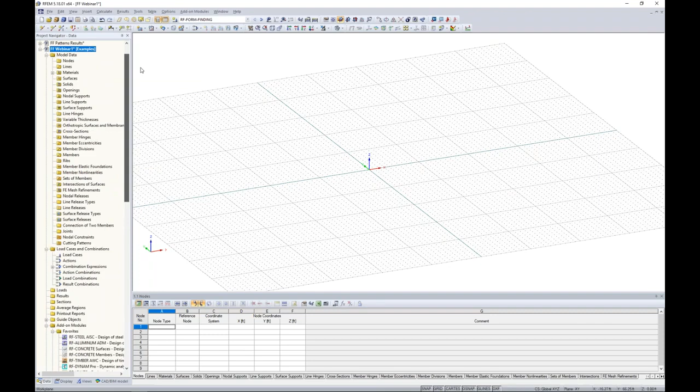Now, our results will also be available to us within the project navigator, which we'll get into a little bit later on. The fourth tab down here may be new to some of us. By enabling that CAD BIM model option, we now have this fourth tab to import in an IFC or a STEP file. So I can just simply click on one of these buttons and I have available to me my IFC building for my office building.

So with a few steps, we can see here that the IFC file is imported into our main program, RFEM. Now, I want to be clear that these are still just components. They're not actual elements within RFEM, meaning they're not surfaces, members, they're not solids. We would need to convert those to elements in RFEM. So right now, this is just serving as architectural purposes.

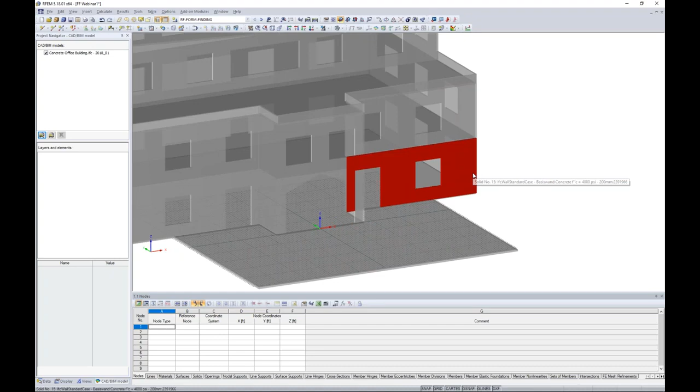And in particular today for this concrete office building, I'm trying to design a canopy on the front face of this building, but I want to make sure that it lines up perfectly with the front face of this office building. So that's the whole purpose of importing in this IFC file. We're not going to be designing the building today.

So what I can do is to take one of these elements, and in particular, we'll start here with our front slab. I can right-click to create a surface. Now, the program generates some arbitrary thickness and selects some material within the model. This really doesn't matter—we're actually going to end up deleting this slab. We're purely using the nodes and lines for geometric purposes to generate our canopy structure. So I can just click OK.

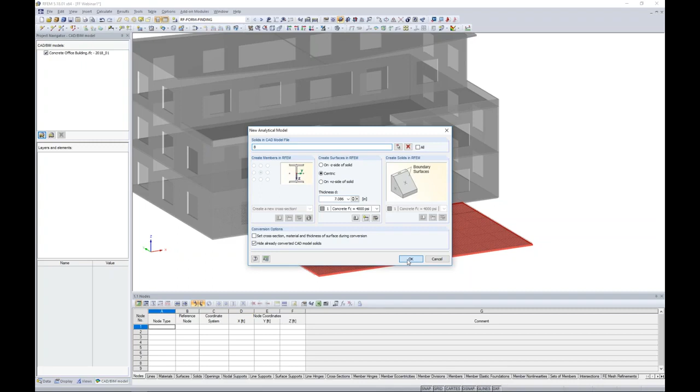So once I've done this, I can actually hide my IFC file, and all I'm left with is this shell element that I converted from that file into RFEM. So what we'll do here is to turn this into wireframe view with my view options up at the top. And I'll take this line element on the left side of my slab.

I'll right click to divide the line by a certain distance. So here is where I can select 23 feet from the line end, and I can see with my black arrow here what's the line start and what's the line end. I click OK. So all I've done is generated an additional node here right along this line length.

Now I can hold down my control key to select that new node in addition to this node here. I continue to hold down my control key and I take advantage of what's called our drag and drop. This allows me to make quick copies within the model without using that move copy tool. I want to additionally use this connect lines or members tool up here at the top.

So I select this, and what this allows me to do is to highlight over that node, and it simply broke that line apart in two. So I take these newly generated nodes, holding down my control key to select them, and now I'm going to use my move copy tool.

I'm going to create one copy in the global Y direction, which I can see my global coordinates here of -30 feet, and I click OK. So here are these new nodes generated at a distance of 30 feet in the global Y direction.

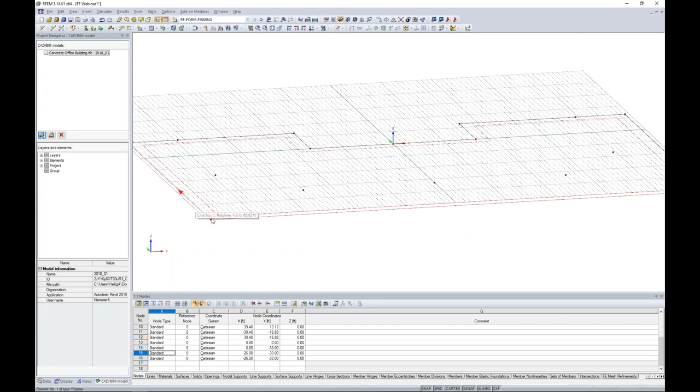This node will highlight, so I use the move copy tool and move it a distance of 26 feet in the global X direction. Once done, I hold down control to select both nodes and use the drag and drop feature to make a copy of the node on the left side. Now that we're done with the basic nodes at the bottom of our canopy structure, I'm done with this surface, so I select it and hit delete, and clean up the model by deleting the line elements we don't need, leaving only our nodes at the bottom.

The next thing to do is generate our columns. These won't be columns yet, just lines, placeholders which we'll later assign a cross-section and material to. To do this, I select the nodes I'm interested in, holding down control to select various nodes, then use my Move Copy tool.

We create one copy in the global Z direction, the vertical direction, of 23 feet. Before I hit OK, I go into Edit Expanded Settings, which allows me to create lines between my copied nodes, saving us an extra step rather than drawing lines manually. Once I click OK, the line elements that will eventually be our columns are drawn.

Now, in the rear of my canopy, this is where it will be framing directly into the office front face, so I don't need to draw columns back here. Rather, we attach at the top of the canopy directly to the office building. So I highlight these line elements and the bottom node and delete them altogether, leaving just these nodes up top.

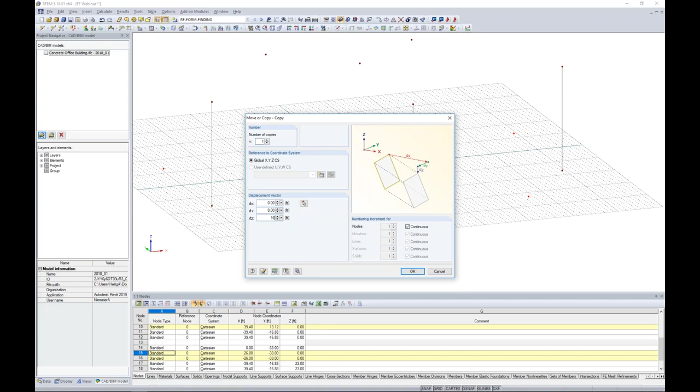In a similar fashion, I select the individual nodes left down here at the bottom, use my Move Copy tool once again, this time a distance of 16 feet, leaving this setting to create lines between nodes. I click OK, and here are my additional columns.

Again, back here we're framing directly into the office building, so I don't need columns back here, just these nodal points at the top. Just like that, we've finished the basic geometry from that initial slab. I'll turn off my grid down here, and I'm left with just these node points, ready to draw the outer profile of my canopy structure.

I can choose a new line element here in our quick tools. Keep in mind, I still have drawn no members within the program, these are just simple lines and nodes, exactly what you'd think of in AutoCAD, line elements only. We choose this straight line option.

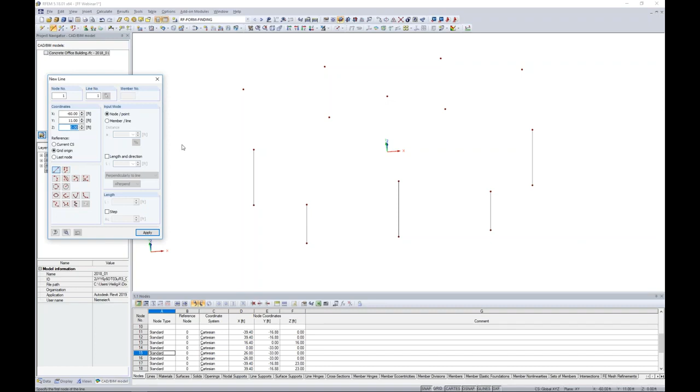Here I can snap to the different nodes I've generated, and the program is fairly good about using the O-snap settings to snap to the top of these nodes. I continue around drawing the structure, then right-click to exit, and we have the outer profile shown.

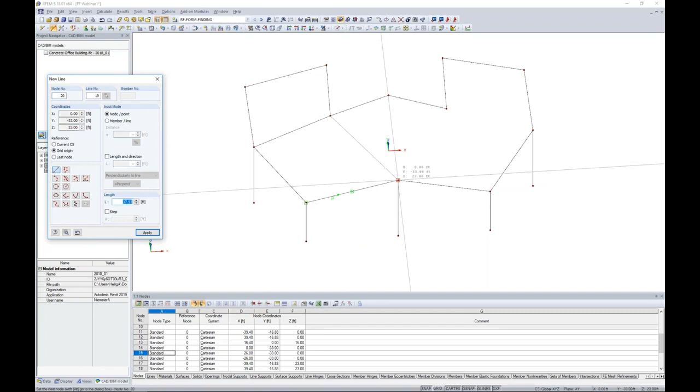Now I need to draw lines to define the individual cells of my canopy, so I continue by snapping from one node point to another, and we do so on the right side of the structure. Just like that, we are finished.

If we're interested to see how these elements frame into my office building, I can reactivate this IFC file of my office building. Remember, these are just components used for architectural purposes, so I want to make sure my canopy isn't framing over any windows or doors. So far, it looks okay.

So we turn that IFC file back off, and now we want to begin drawing our cable elements. These cable elements are going to be placed on the boundary lines of my fabric membrane, which is pretty common within membrane construction.

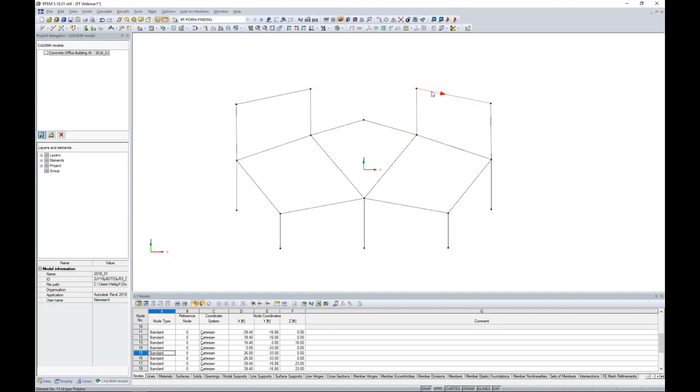These tensile cables will take the tension forces as the fabric is stressed. At locations where we're framing directly into the office building, these line elements will be cable elements, so we can assign cross-section properties for the cable elements to these lines directly. But for the other line elements at the front of the structure, we have a small issue. These will eventually be HSS steel members, but I also want to show cable elements at this exact same location. The problem is that both the steel member and the cable elements cannot share the same line.

So I need to draw a small offset line here to represent my cable as an arc member. How I can do this is to turn back on my grid at the bottom, and we don't want to use these global X, Y, and Z coordinates because we have some pretty odd geometries here. We have a nice feature in the program where we can define our own work plane by clicking on 3 grid points.

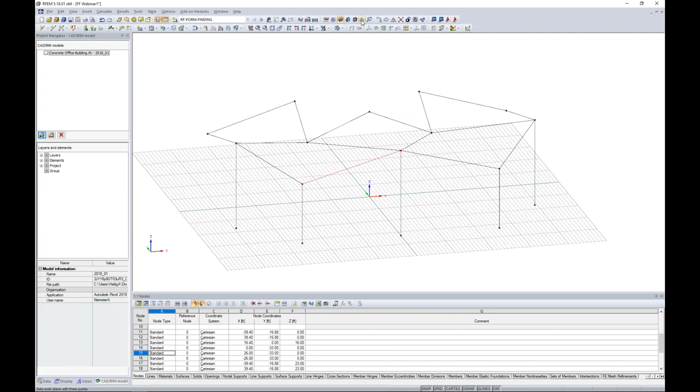So how I can do this is to click this option once, then click 3 times to define my grid, and you'll notice that my drawing grid is automatically placed at the incline that I've specified with those 3 points. It has a new coordinate axes of U, V, and W. So with this new coordinate system, I'm going to draw a new line again, but this time...

I'm going to draw an arc via 3 nodes. So what I can do is simply click on the point closest to what will be my office building, and click on the column point, and there we have it - a simple arc element. Now keep in mind, the arc radius is completely arbitrary, it doesn't matter what we set this to. The program will later override the shape with the form finding process, based on the pre-stresses that we put in, to find the correct catenary shape for us.

So I'm going to do the same thing at a different location here for my cell points. Again, completely arbitrary. We need to move up to the second cell, and we need to change our user-defined drawing grid. So I click first to reset the drawing grid, click it again to define my new point, and I can click on 3 points here. Now you'll notice that I have a new drawing grid at a specified angle.

So we go to draw a new arc here with the given points, and I can simply snap to these points, again, any arbitrary points. We need to lastly do so over here, so we click this option in our toolbar for a user-defined grid, click our 3 new points, and now we have the specified angle given.

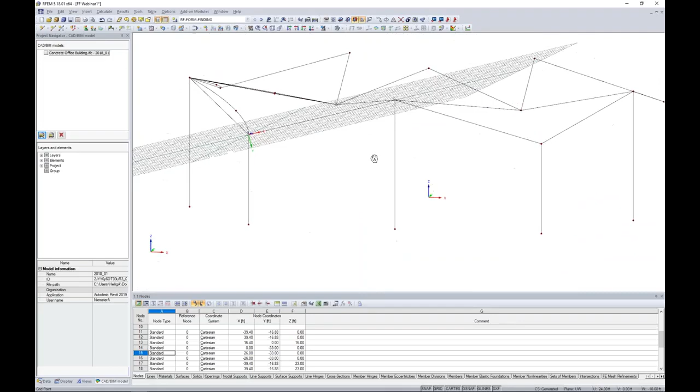We go back to draw a new line element as an arc with 3 points and continue on with this process for our additional cable elements. And one more time for our 3rd cell.

So deactivating this grid at the bottom, I have these cable elements shown here, and I'd like to show them on the other side. Rather than going through that entire process again with our user-defined grid, we can hold down our control key to select these cable element lines and take advantage of our mirroring tool - exactly like what it sounds like, similar to what you'd see in AutoCAD.

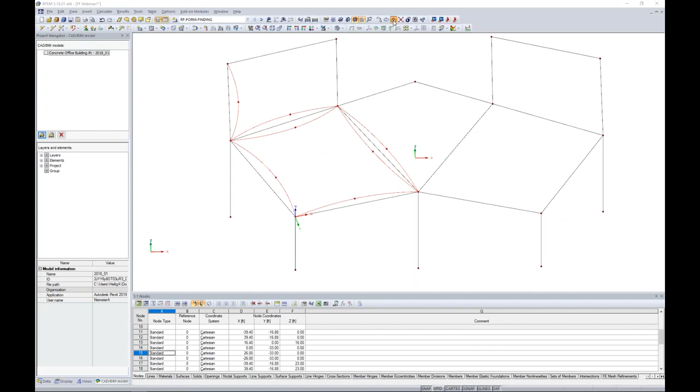We can create a copy by mirroring about the global YZ plane, and I can click any point within the model to mirror about. I click OK, and here we are presented with our cable elements on the other side of the structure. So that just saves us an immense amount of time.

So now that we've defined the boundary lines of what will be our fabric membranes, we can move on to drawing those 2D surfaces within the program. For this, I would typically suggest for a flat membrane to draw a new surface element. But you'll see here that all of these surface elements within RFEM are only considered in a single plane. If we take a look at this very complex geometry, I think we can make the assumption that these surfaces are certainly not in one plane.

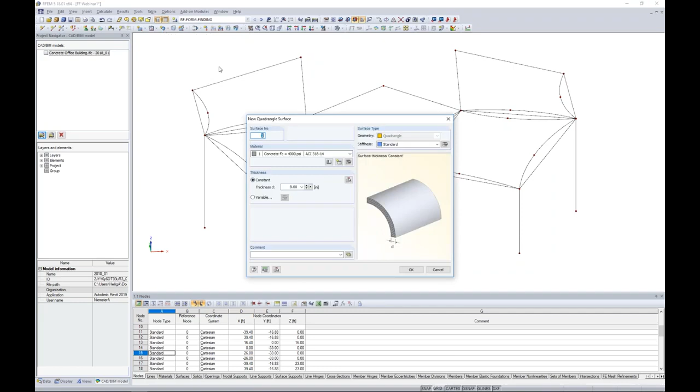So this is where we need to use the option for a quadrangle instead. We can use that from our drop-down list here - quadrangle, general 4-sided surface. The stiffness will be set to membrane orthotropic.

The next thing we want to do is define our membrane material. In all cases for these membranes, you're likely going to have to create a new material. We can do so by creating a new material, and a dialog box pops up where we give it a name. We'll call this one membrane.

We can even change the color. So perhaps for my model here, I go into my color palette and I'd like to use a green color instead of blue for my fabric membranes.

We change the material model here to orthotropic elastic 2D. I want to preface this that this information is likely something you'll get from the manufacturer, or maybe from your own testing methods or other relevant resources. For our example today, we know from our manufacturer that our fabric membrane is stronger in one direction than the other. But for the time being I'm going to set this as an isotropic membrane. The reason is because with these complex shapes of my membranes and the complex geometry of the canopy, I don't yet know which way I should span that strong axis to take the high tension forces.

I'll show you later on how we can easily determine that. So for right now, we want to set this to an isotropic material, which means it has the same stiffness, or modulus of elasticity, in both the X and Y direction. But keep in mind, we'll come back later to adjust this.

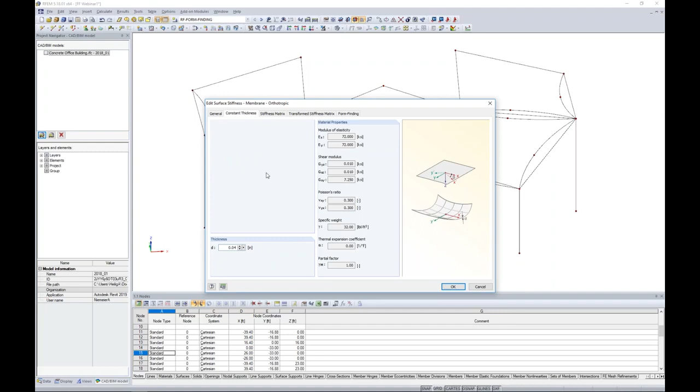What's quite powerful is that we can view the stiffness matrix of our membrane. So if you're interested, based on the material properties we put in here, this is exactly the stiffness matrix that will be reflected in the RFEM model.

And finally, our form finding tab. This is available because we have activated the form finding module at the beginning of the presentation. We have two different calculation methods for this, either standard or projection. Standard is pretty typical for fairly flat membranes, and we'll be using that for today. Projection would be used for more conical type structures.

With the standard calculation method, we can specify a pre-stress force in both the warp and weft directions. This is in the X and Y directions, and we'll choose 0.5 kips per feet. I click OK, and now we're done defining all of the various settings for our membrane.

We click OK, and the program asks me to go ahead and define the boundary elements of my fabric membrane. So you can see that as I begin to click what will eventually be these cable members, our fabric membrane is created. For the last cell over on the right, we right-click to exit out of that dialog box.

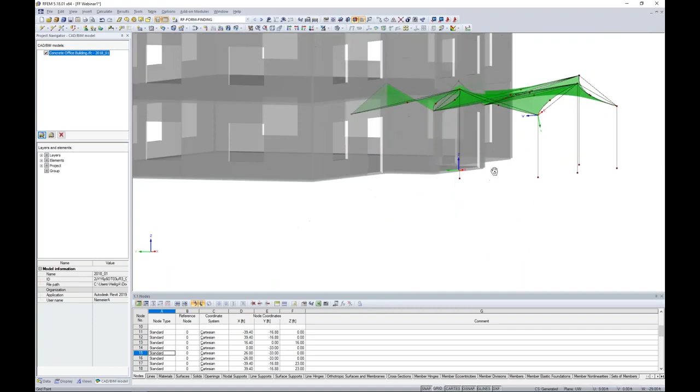Again, if we're curious to see how this frames into our concrete building, we can activate that IFC file, and we can see that everything looks to be great so far.

Deactivating that, we want to move on to the cable elements. So again, right now, all of these cable elements are just lines. They don't have a cross-section or material defined.

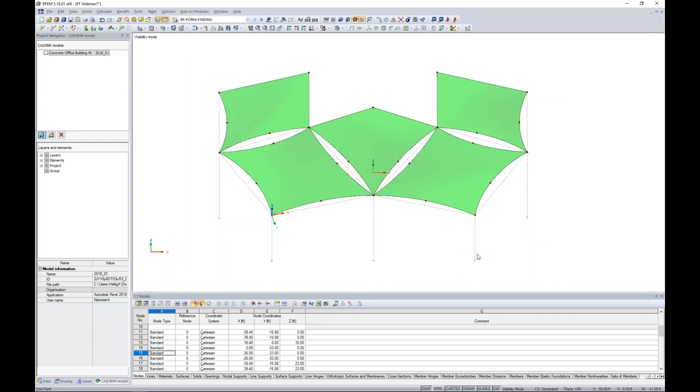What we can do is hold down our control key, select all of our membranes, and choose visibility by selected objects. When I do this, I can highlight all elements within my model. You'll notice that down here, my column lines and other various lines are not available to select, because I've deactivated them in my view. I only can select my membranes and their boundary lines.

So I can right-click to edit the lines, and we're brought into our line dialog box. The third tab here is called Member. This is where we can make a member available by selecting this checkbox, and here is where we can set the member type to cable.

The program's telling me I need to create a new cross-section, so I'll access my cross-section database, which you can see here we have all of our various cross-sections available within RFEM. We have several parametric sections, massive sections, thin-walled sections.

We have all the rolled sections from the various standards, and in particular today I'm going to use this solid sections. This just has some pre-populated diameters. They're basically just round bars populated from the AISC with set diameters, but you can always create your own with a parametric section. We'll choose a 1/2 inch diameter cable.

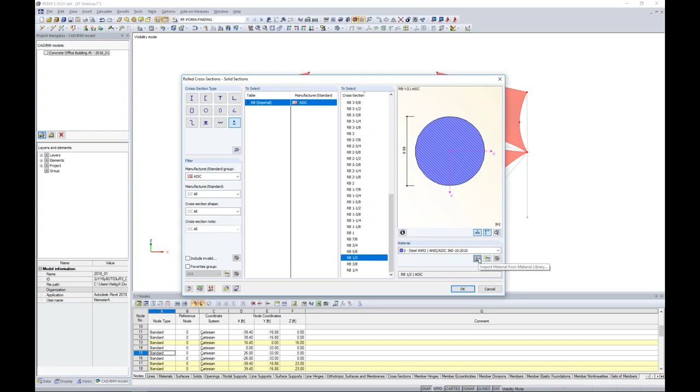The material is also set within this same dialog box. So with the cable materials, I'm going to access my material library. Similar to the cross sections, I want to use my filters over here on the left, and I choose metal, but under my second drop down, we can choose cable.

Typically when you first populate this, you'll only see a few materials available here from the manufacturer Pfeifer. If by chance you're using this manufacturer, then great, your materials are already set within our database, but likely you're probably going to have to add your own from whatever manufacturer you're using of those particular cable elements. So we can do so adding our own material with this button down here, create new material.

So what I went ahead and did is I created a new material, which if I back out of this, we'll be able to see it. And I called this one my ASTM cable material. Then we can put in the material properties, and you can set the applicable filters over on the left that you would like them to be available.

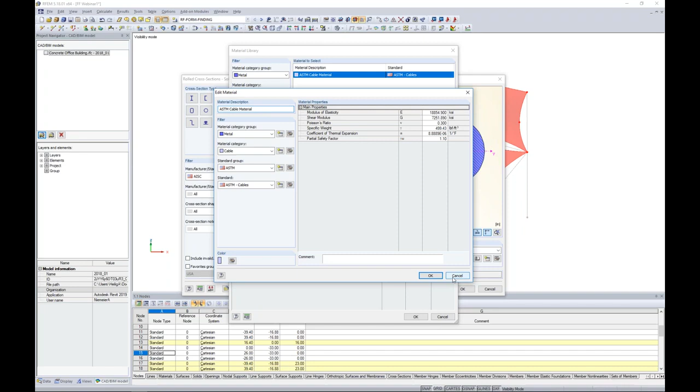Once you have input in these material properties and you've saved this material description, it will always be available for any future RFEM model, so you don't have to define it every time you create a new model. So once we've done this, we'll go ahead and use this ASTM cable material with my material properties shown here. I click OK.

And before we click OK out of this dialog box, similar to the membrane elements, we need to set our form finding settings. So I go ahead and click on this expanded settings dialog box, and this is where we can activate either a target cable length, a cable sag, or maybe we just apply a pre-stress force directly. So this is only available with RF form finding activated.

Essentially what this allows us to do is to model these cable elements as either straight lines, which you can see back in my RFEM model, or pretty much any arc shape like this. And everything will be overwritten based on these settings here. So for today, I want to use a target cable sag of 10%. I click OK, and I click OK through all of these dialog boxes.

Now, I know it's a little bit difficult to see, but we do have cable elements set for the boundaries of our fabric membranes. So I cancel out of this visibility mode, and we need to continue with this same manner for the additional line elements that are left here.

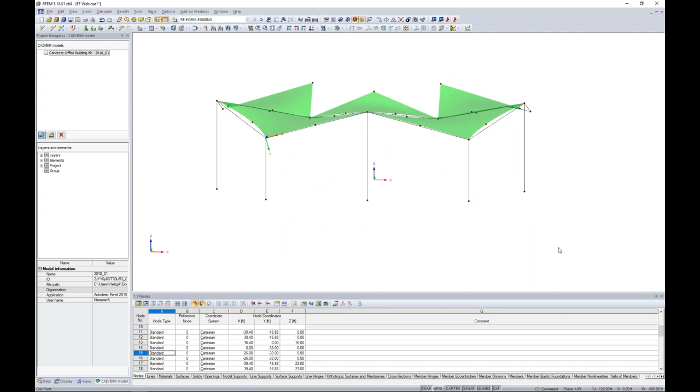So we'll start off with our columns. I'm just going to use my selection box here to highlight over the vertical lines only. I can double click, and again, we have a member tab where we can make this member available. Now, of course, we want to change this member type to beam. We certainly don't want cable elements for our columns.

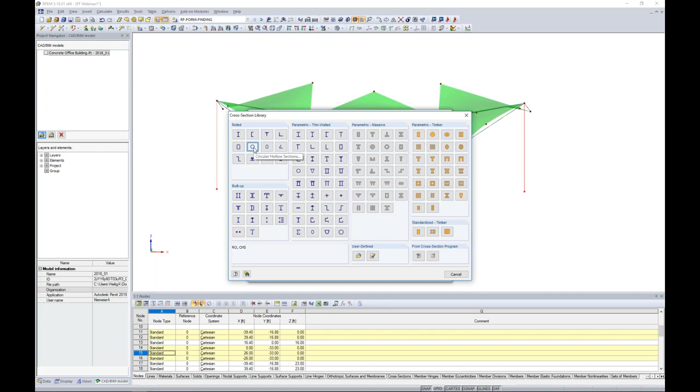We want to choose a new cross-section from our cross-section library. And here is where we can access our HSS sections directly from the AISC. Within this drop-down box, you'll also see the various other standards and manufacturers available. In particular, the CSA standard will be available here as well. So we choose the AISC 15, which is the latest version.

Now for my canopy structure, I'm really not trying to detract too much from the aesthetic appeal of this office building, and we know that this canopy isn't going to take a high amount of vertical gravity loads. So what we can do is choose a pretty low profile section here. We'll choose an HSS 4-inch diameter here, which we can see the cross-section properties available to us with this info button.

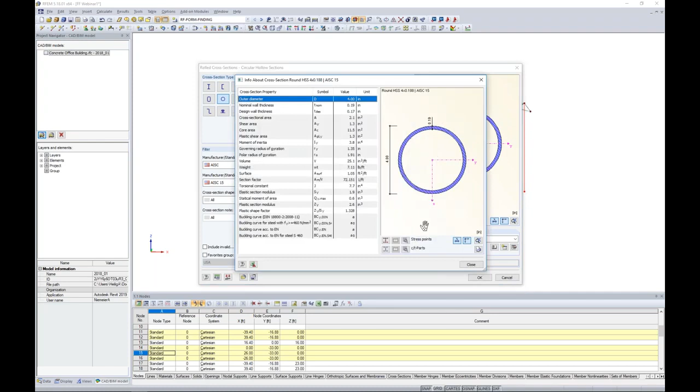The material is also set within the same dialog box, similar to what we just saw with our cable elements. So we can access our material library, and we use our filters over on the left here to select steel from the ASTM, and here we have available the 2016 version with all of the AISC materials available to us here. Again, if you want to create your own material, you can do so with that same button down at the bottom.

For today, we want to choose A500 grade B, and our given material properties are shown here. Once I'm done with these dialog boxes, you can now see these columns have been generated with the applicable material and cross-section shown in the rendered view.

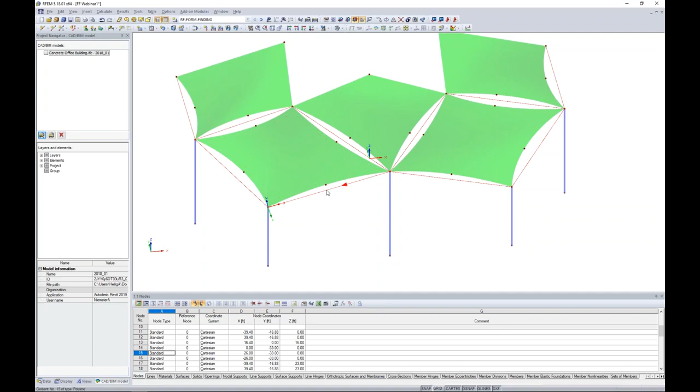So we need to continue doing so for our remaining line elements here. These will actually be our compression members, which we also want to set as HSS. We'll double click on these lines and again just choose the member type available here. The member type this time will be set to truss.

The only difference between a truss and a beam member is that the program automatically releases that moment at the member end. It's just a quick way to set in the program that we want to transfer only shear and axial forces. You'll notice that my member hinge option is grayed out down here.

We go to our cross-section library once again, and we choose our HSS sections. Because these are taking quite a bit higher loads, especially in compression, we need to choose a bigger diameter. In particular, we'll choose a 7.5-inch diameter.

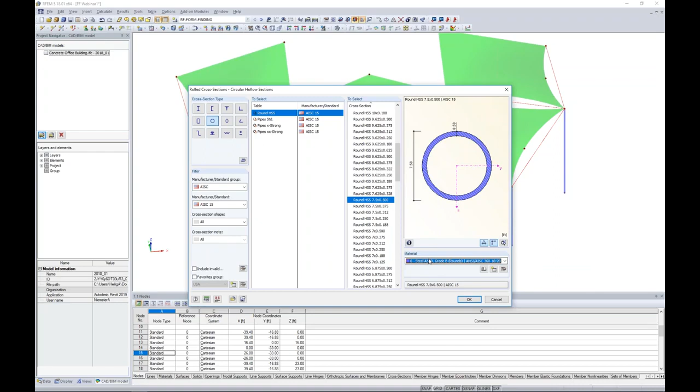I've already defined that steel A500 grade B material, so I don't need to define it again unless I want a different material category, but it's available to me here within my drop-down box. I click OK, click OK once again, and now you can see those HSS members available for our structure. So before we can run the form finding procedure, we obviously need to support this structure.

So what we can do is select a new nodal support up here in our toolbar. I choose a new nodal support, and we have a few default options shown. I will use the first default option, but to explain what's going on with these nodal supports, we have our 3 degrees in translation and our 3 degrees in rotation.

So for the bottom of my columns, I'm going to restrain translation. I also want to restrain rotation about the global Z direction. This is purely torsion for that column, so it's not free to rotate about its own axis.

We also have the partial fixity here for spring supports, and the nonlinearities are important, especially for today's presentation, because we have an option here called the form finding stage only. If by chance you want to apply a nodal or line support during the form finding process, when we're applying these pre-stress forces to both our membrane and cable elements, and you only want that support applied during that particular stage only, we can select this form finding stage only.

You'll notice the nodal support changes to blue to indicate there is a nonlinearity. So what will happen here is it will only be applied for RF form finding to find the initial pre-stress shape. Then for all other subsequent static loading, such as live load, dead load, snow load, and so on, the support will not be considered at all.

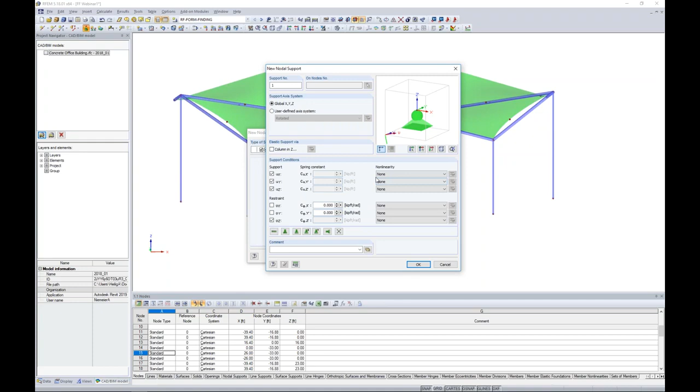So extremely helpful for when we're trying to find stability during that form finding process, but you do want to make sure that this would truly be available out in the field when you are pre-stressing these membranes. You don't want to use them in the model if you're truly not using them out in the field. So for today, we're just going to use that first hinged option for our support with no nonlinearities applied, and we apply them to the bottom of our columns.

Now, for the locations framing into the office building directly, we also want a pin support, which I can access with my nodal support once again. I'm going to create my own definition here because I want to release the moment in the Z direction as well, so I only have a typical pin with translation restraint in the X, Y, and Z. I've now defined that particular support type, so I can click directly on my nodes where they will be framing into the office building. And just like that, we are done with our geometry.

So back under the data tab, as I mentioned, all of our input data has been applied here, so we can easily make changes to all of these cross sections as well as materials. The next thing to do is to run the form finding process.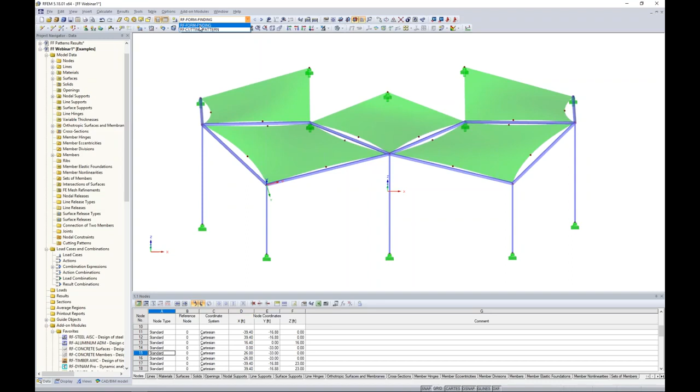So I have applied no loads to my structure yet. I've only applied those pre-stress forces. In my drop-down box here, we see RF form finding available to us, and we can easily run a quick analysis for this. So all I'm doing is applying those pre-stress forces to both the membrane elements and the cable elements to find the true deflected shape here after those pre-stress forces have been applied.

So what I'm presented with are my results within my project navigator, and we can see that tab available to us here. What's probably most interesting is the initial deflected shape. I think this is very telling for us to know if we've defined everything correctly. If you're seeing a deflected shape that makes absolutely no sense, then you probably have modeled something incorrectly. Perhaps we're missing those cable boundary elements to take those high tensile loads, or maybe you're running the wrong calculation method with the form finding procedure. So you definitely want to take a look at the deflected shape here.

So what the program has done is create a new deformed mesh based on my settings here that we can now move forward with. But before I do so with the additional loading, I want to point out some very powerful features in our results that are given to us after running RF form finding.

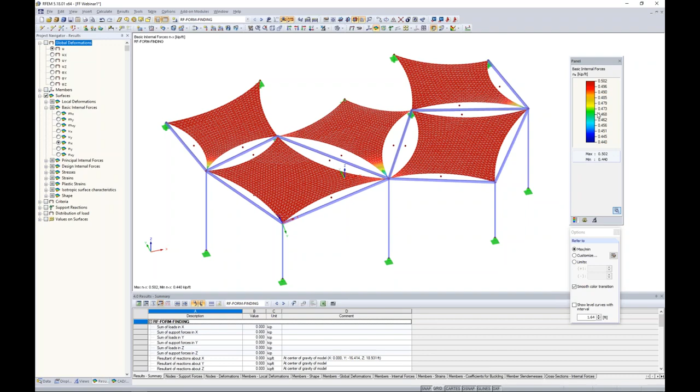The first would be to take a look at our global deformations, but we can also look at our surfaces, and in particular the NX and NY forces. These are the tensile forces that have been applied to our structure. Remember, I set this at 0.5 kips per foot, and that's reflected here almost identically within my basic internal forces, NX and NY. That's a really good sign that the pre-stress forces are available to me with these axial forces for my membranes.

The other interesting thing within our results is under this shape tree, where we can view the different contour lines. These show us from the origin point of 0 exactly what elevation we're sitting at in terms of feet. Obviously, the points sitting up at these higher columns are going to have a higher contour line than the membranes sitting at these lower columns.

We can also view the inclination. This makes sense that if we look at this location here with red, we have a pretty steep incline where this fabric membrane is framing into that support. But at these locations at the center of the membrane, we have almost no inclination, close to 0. That's where the fabric remains fairly flat. We can also view the inclination direction here to give us a sense of exactly how this fabric is pre-stressed during that form finding procedure.

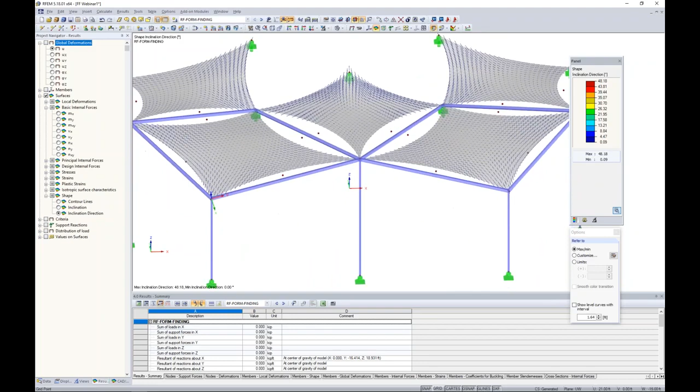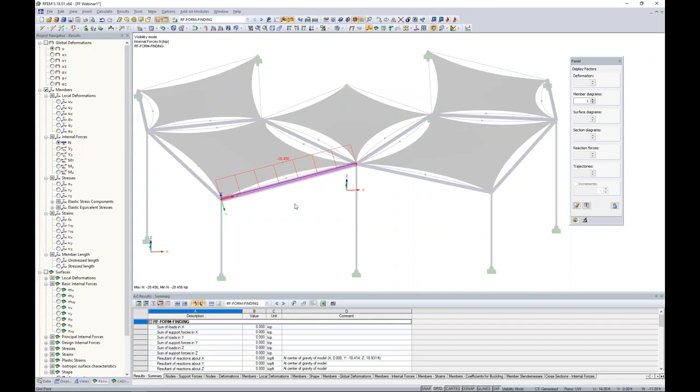In addition to my surfaces, I also have the internal forces available for my members. Perhaps I'm interested in viewing the axial forces within some of these HSS members. I can take any one of these members and create a user-defined visibility here, only looking at this single HSS member, and view those compression forces based on the pre-stresses applied to the membranes. I can always right-click to view the results diagram, which lets me view in more detail exactly what's going on along the member length.

If I cancel out this visibility and take a look at only my cable elements, under the Views tab within our Project Navigator, we can select our members by type and choose the cable elements only. Now I'm only viewing the results for my cable elements. I go back to my Results tab and view the axial tension forces within these cables.

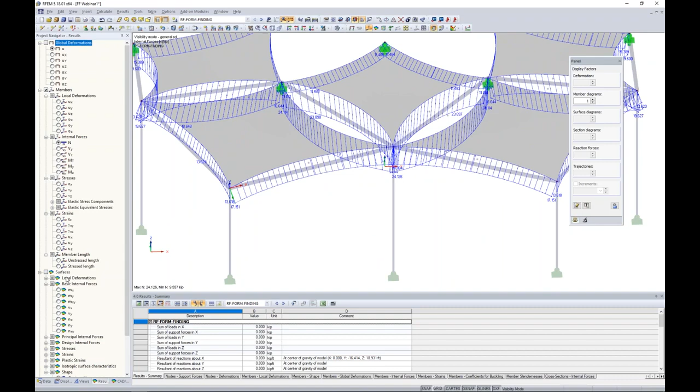In addition, we have a couple options available under member length. We can view the stressed length of these cables as a member diagram in terms of feet—this is the length after we've applied that pre-stress force. We also give you the unstressed length. I think this is really important because it's information we want to give to our manufacturer, to ensure they manufacture these cables at the correct length, probably this unstressed length, so that by the time we get out in the field and apply these pre-stresses, we should achieve this stressed length. So both are given to us.

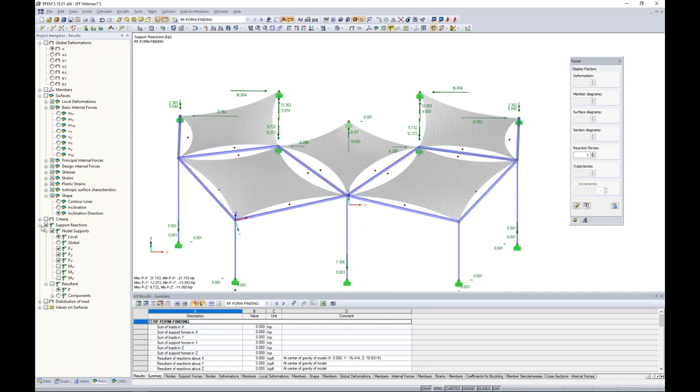Now, additionally, if I take a look at the full model view here, we can also view the support reactions. This might be important for designing the connections that are framing into our office building. All of that information is available for the form finding process only so far. Of course, much else to cover, but we'll go ahead and move on with our structure—so far I have only applied those pre-stress forces.

I've applied no additional loads to my structure, such as live load, snow load, and so on. So we want to go ahead and do that now.

I'm going to create a new load case up here in my toolbar, and up pops my edit load cases and combinations. My first load case description will be self-weight. What I'm going to do here is not put self-weight under dead, but actually put it under form finding. So what exactly am I doing here? Well, that form finding process I just showed you did not include self-weight.

Just keep that in mind. In reality, when we go out to the field and pre-stress these elements, it's inevitable that self-weight will be included. So you'll want to create a load case under the form finding category with self-weight active in the negative Z direction to account for that during the form finding process. We didn't do that initially, but now we can account for it with this load case. Any other loads available, such as for pneumatic structures, we'd also want to put under this form finding case. It's important to understand that for any additional load cases, the program tells me I have to clear my results because previous results are no longer valid. We don't want to add any additional self-weight to any of my other load cases since we've already accounted for that in the initial self-weight load case during form finding.

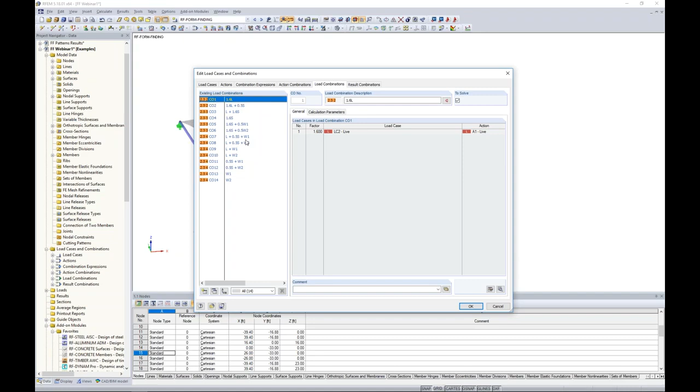My load combinations tab will simply list out all of my LRFD load combinations based on the standard. My result combination is just an envelope solution - both my max and min values will eventually be presented within our results for all of the LRFD load combinations. So what I've done now is set up those load cases and combinations, which should be available to us in our drop-down box here.

But now I actually need to apply those loads to my structure. My self-weight load case - we don't need to do anything, everything's done automatically there. My live load case, according to ASCE 7-2016, in particular Table 4.3-1, addresses awnings and canopies for fabric construction, and this requires a minimum live load of 5 PSF. So to adhere to that, we want to apply a new surface load, which we can do in our quick tools up at the top. The load direction will be set in the global Z direction with a magnitude of negative 0.005 kips per square foot. I click OK, and then I simply highlight over all of my membrane surfaces.

In a similar fashion, we want to apply snow load. So what I'm going to do here is go back to a new surface load. You'll notice I have snow load selected in my drop-down box here, and now my load direction is going to be in the global Z projected area.

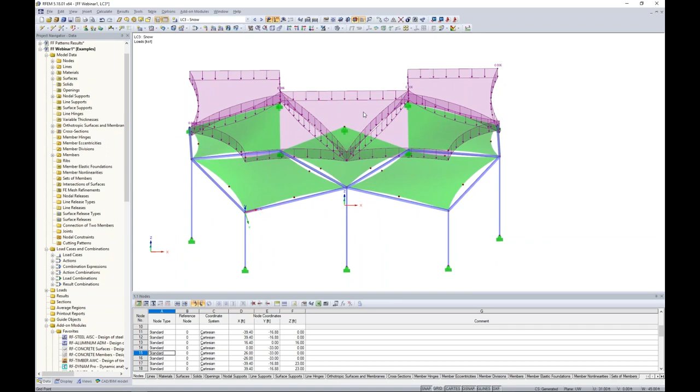I'm going to apply a fairly small magnitude here. Let's say we're in an area that we're not too concerned with snow loads, but we want to apply 6 pounds per square foot. When I click OK and highlight over all of these members, the advantage of a projected load is it will take into consideration the inclinations of my surfaces. In areas with high inclination, that's where we'd see snow slide off, so the program accounts for those angles. At areas where our membranes are relatively flat, we'll see higher snow loads. That's the advantage of a projected load.

When it comes to our wind loads, according to ASCE 7, Table 30.11-1, this addresses wind loads on attached canopies. For time's sake, we don't have time to get into this today, but I just wanted to briefly mention that.

For these specialty type structures, I want to mention something from my PowerPoint that we are currently working on in development — a standalone program called RFlow. What RFlow will eventually allow us to do is simulate wind flow around structures, helping us understand wind effects on specialty structures where there's really no clear approach within the various standards.

It could be argued that our particular canopy today is a pretty complex geometry, framing into this office building. How exactly do these wind loads affect specialty structures like this? This will be a huge advantage once we release it. It's not quite ready, but we do plan to integrate it with the RFEM model, so you'll be able to bring the geometry into RFlow, apply wind loads, and export those loads back into RFEM to be considered in the analysis.

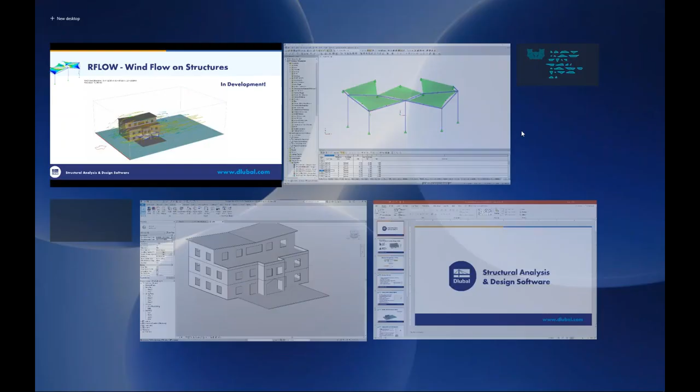So I did want to mention that—something exciting to look forward to—but for now, we have to jump back to RFEM and manually apply these loads.

For our simple load cases today, we'll apply a new surface load in the projected X direction. I only want the surfaces that have actual face value according to the global X-axis to be affected by these wind loads, and we give it a magnitude of 0.15 kips per square foot. I can highlight over my particular membranes here. Now for the downward pressure, we go to a new surface load.

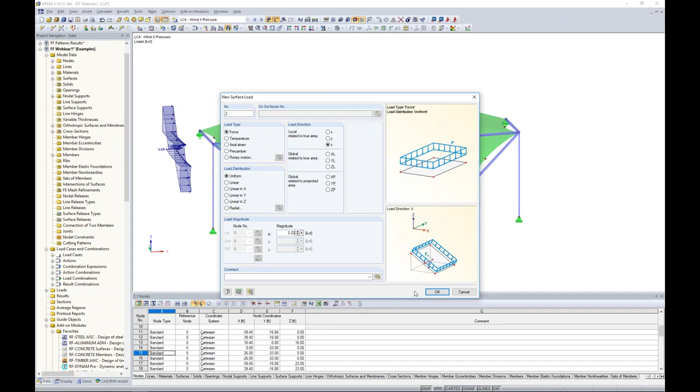We want to apply this according to the local z-axes of my membrane. I'll show you in just a minute how to view those local axes, but trust me, the z-axis is how we want to apply these to our structure, with a magnitude of 0.02. This is based on the local axes of the member, so now we can see those loads applied normal to the surface no matter what the geometry is.

For our wind in the X uplift direction, it's the exact same scenario. We just simply want to change the magnitude direction and put a negative here for our uplift pressure, highlight over our members, and now you can see that uplift pressure normal to all of those surfaces.

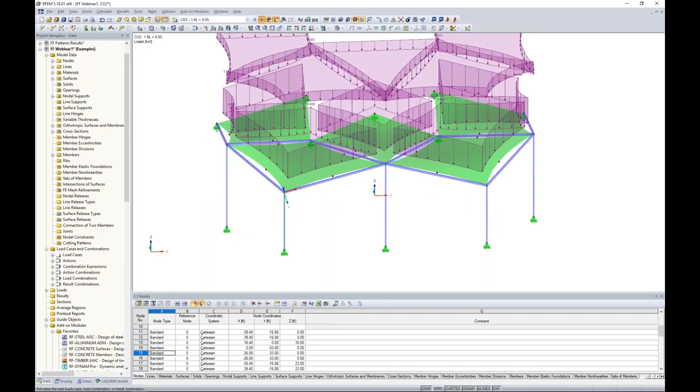We also want to apply that small lateral load in the X projected direction. This time we'll give it a slightly higher magnitude than the previous load case, and highlight over all of our members. Then we can scroll through to take a look at all of the different loads applied to our structure based on wind, live, snow, and of course self-weight.

Before we're ready to run an analysis, remember several minutes ago I explained we're setting this to an isotropic material. In reality, we have an orthotropic material. I need to determine which way to orient these membranes in order to take the highest tensile forces. So how exactly do I consider that?

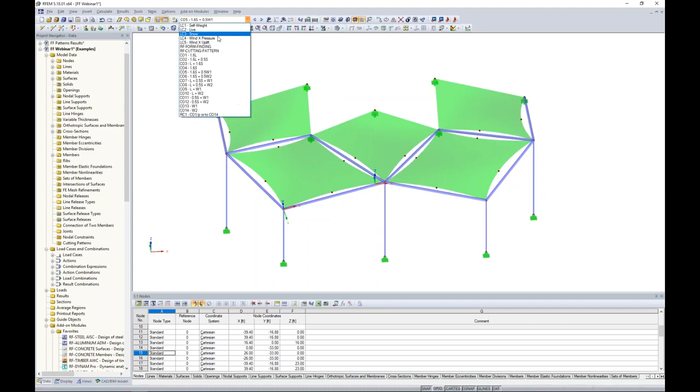What I want to do here is jump to only my live load case, and I'm going to apply the live load case only to the structure. Remember, we lost our form finding results previously because I said I want to include self-weight now. So we're now including self-weight, and the program needs to run back through that form finding procedure. Then we're applying the downward load for live load.

Now the program is going to cycle through. You can see the iterations here for max displacement for the different iterations applied, and eventually we'll be presented with our results. So again, we're using just this single load case to determine where these high tensile forces will be acting on our structure.

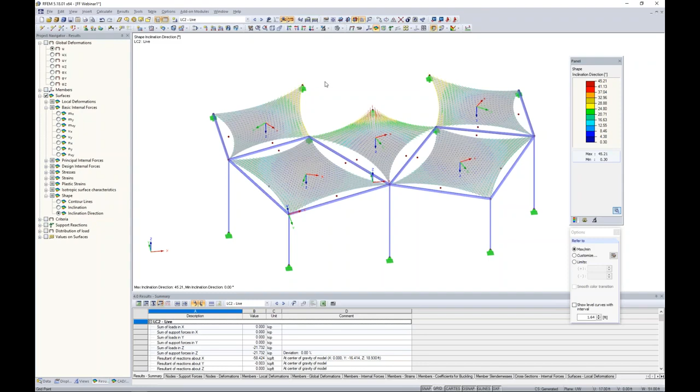So now we're presented with our results here. This is similar to what we've seen before, but now we have this live load acting down on the structure. I'm going to right-click on these surfaces to view my local axes, so there's my X, Y, and Z axes. Now, if I take this into an elevation view, I want to choose this option, surfaces, here from my results.

In particular, Alpha M is going to show me my trajectories for my load distribution, in particular for N1 and N2. This is showing me where my high tensile forces are within the member, and we can use it in addition to this colored profile panel here.

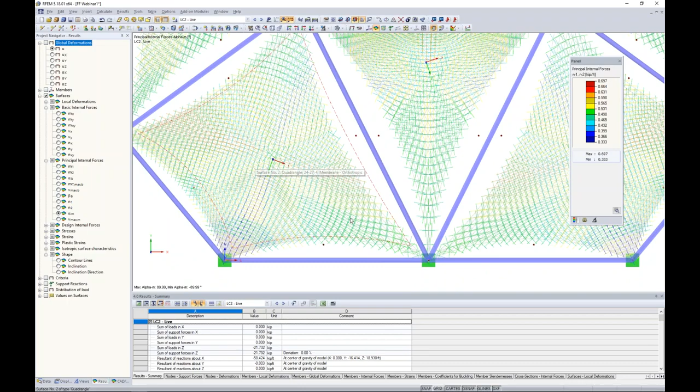If I take a look and compare, I know it's a little difficult for you to see, but I can tell my high tensile forces are spanning closer to the office building support down to where this column is for my first membrane. If we look at the second membrane, the higher tensile forces span in the opposite direction, from our upper left column down to our lower right, and so on.

So how do we orient the local axes of these members to make sure they're taking the high tensile forces? To do this, I'm going to turn back on my grid at the bottom, uncheck the option for my user-defined grid, and change this to the XY plane, so now we're just looking at that drawing grid at the bottom of our structure.

We probably want to take a screenshot here, or just approximately remember which way these high tensile forces are spanning, because once we draw a new line element, the program will suggest that I clear my results in order to change any geometry within the model. That's not a problem.

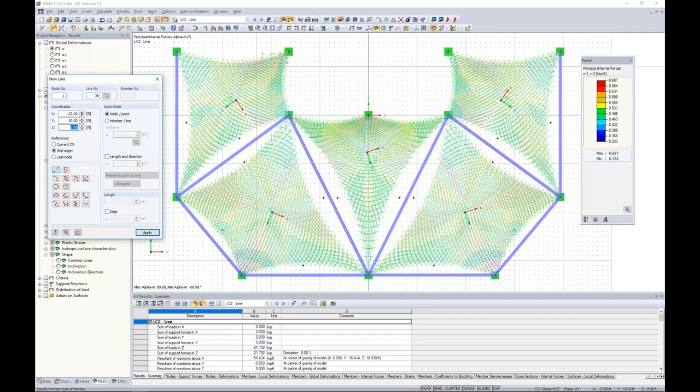I'll go ahead and create my first line element spanning in those high force areas. I clear my results, that's fine. We right-click and do the same thing for our second membrane, and finally our third membrane here. I'm going to take these two line elements on the left side and mirror them about my YZ plane. I click OK, and now I have those line elements shown on the other side.

So you might be thinking, what are these lines going to help us with down here? If I go back to the elevation view and double-click on my first surface, I have an axes tab. This axes tab allows me to line up the local x-axis parallel to any line I choose within the model, and I choose that line element I just generated. I click OK, and now you can see the local x-axis lines up perfectly with that line.

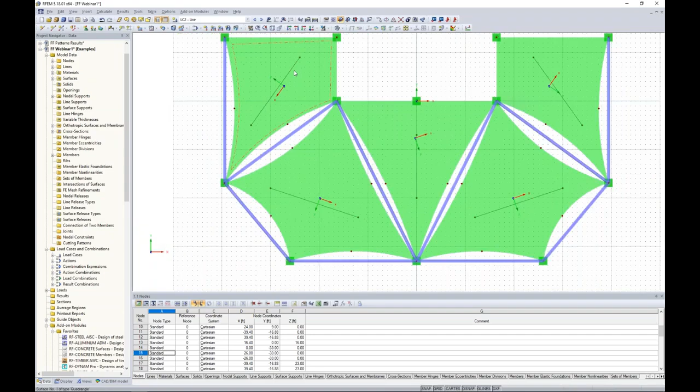We haven't really affected our model otherwise with these line elements down at the bottom of the structure. I do the exact same thing for my second axis. I choose the axes tab, select my x-axis parallel to my line, and you can see it's fairly close already, and it lines up to my second line. Same option for my third membrane.

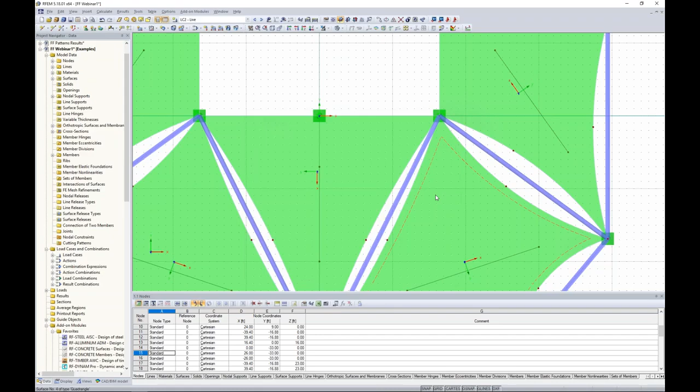I choose the local x-axis parallel to line number 38, and we continue around the remaining structure. The program automatically populates that tab I was just in, so I don't have to fumble through finding the same axes tab each time. Lastly, we choose our last fabric membrane and line the local x-axis to line number 39. I click OK, and now you can see the local axes are all lined up to take those high tensile loads.

The final thing we need to do before running our analysis is remember my materials, which I can access from my project navigator. I can select it graphically as well, but an easy way is to highlight it in the project navigator, and the membranes that utilize that material get highlighted. Concurrently, I double-click on it, go back into my material model settings, and this is where I change the stiffness in the weaker direction of my membrane, EY, to 44 KSI, and click OK. So this is just an easy way to determine exactly which way your fabric membrane should span in order to take those higher forces.

So once we have done that, we're now ready to run our analysis for all these load cases and combinations. Now it does take just a minute, so for the sake of time, I went ahead and ran all those load cases and combinations, and the results should be available to us here within the project navigator.

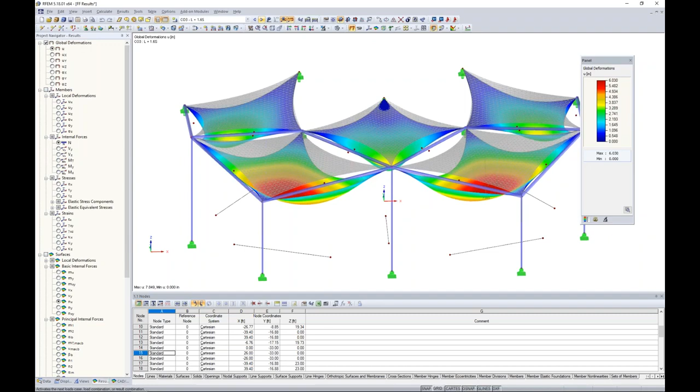I can scroll through the different load cases and combinations, and in particular I'm looking at the deflection. What might be interesting are these uplift load cases where we have that wind pressure applied. So all of those same results that I just showed you are available here within the project navigator, which we don't need to necessarily go through all of those again.

What I do want to briefly touch on is design of the supporting structure. Or actually, let me back up one more time. I want to also explain that when we are designing these fabric membranes, we want to take a look at NX and NY.

Now, probably from the manufacturer, we're given some strength for this material. We want to make sure that we're designing with a specific safety factor in mind. Now, this is usually around 5 or so of the material strength, so you can compare that to these basic internal forces. Now, this all depends on which project you're designing for, maybe which state, which standard, and so on. So that's really up to you as the engineer to determine.

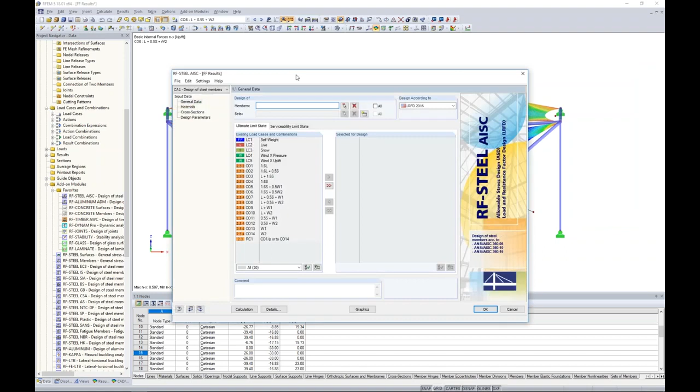But that's likely the information you're interested in for the fabric membranes. Now, as far as our steel members, this is where I want to launch our add-on module RF-STEEL AISC. Now, we also have RF-STEEL CSA for Canadian steel design. And this module is a little bit different than, of course, what we saw with form finding, which was embedded directly within RFEM.

This brings up a dialog box here, and all of my information is brought into this add-on module. I'm just defining a little bit more information that's specific to the AISC standard for the design. Now, I want to explain that I'm really going to breeze through this quickly. I've done previous webinars devoted entirely to steel design that I'd like to refer you to on our YouTube channel if you are interested for more information on this. The whole purpose is just to explain that you can do the entire structure design all within one program.

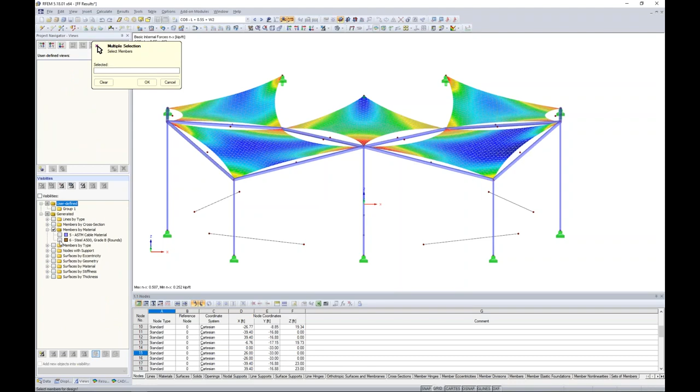So for this, we want to select our members to design. And an easy way to do this is to jump to my Views tab within my Project Navigator, and I can select my members by material. I'll choose my Steel A500, which includes all my HSS members, and I can graphically select them here.

I can choose my LRFD load combinations to design per the ultimate limit state, and I'm designing per the AISC 2016 LRFD. Now you can see that the materials are populated here. Steel A500 is brought in. My cross sections are all brought in from my main model. The effective lengths, for example, would be my unbraced length for buckling about the strong and weak axis, flexural torsional buckling, lateral torsional buckling, and so on.

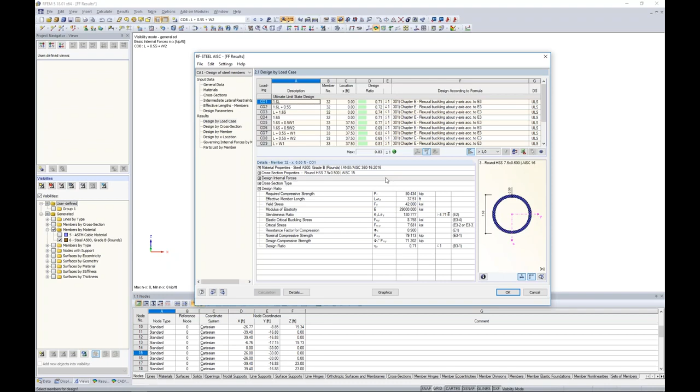So what we can do is run a calculation here. Now, all those internal forces for my members from all the different load combinations are quickly brought in. You can see how quick that solves. The AISC equations are applied to each member, and we can view our results in table format.

So when we view the design by member, we can scroll through all of these different tables here to see how exactly the AISC has played out for these particular members. You'll notice everything is highlighted for these tables and synced up within the RFEM background. We're getting a design here for our HSS members of 0.83, which I would say is pretty great for design purposes.

We can view this information graphically back in RFEM, so we're technically still within this steel AISC module, but we're viewing our results graphically here back in RFEM. So again, I know it's a really quick explanation, but again, refer to those previous webinars that I have created.

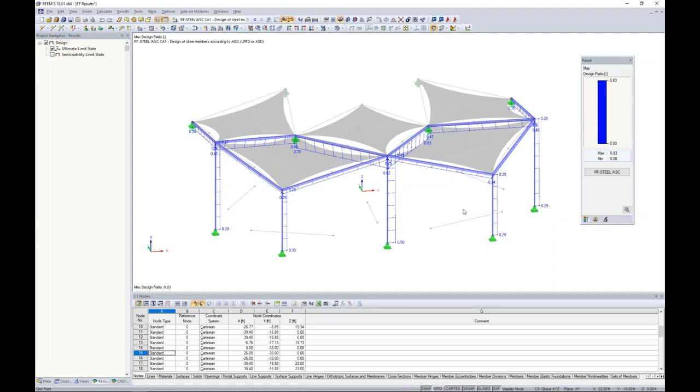Okay, so the next thing that we want to do is to quickly generate our cutting patterns. And for this, what I'm going to do is go back here to my PowerPoint to explain a few features of the add-on module RF cutting pattern. So what this allows us to do is to generate small planar cutting patterns in a 2D environment, which we will eventually use to create a double curved membrane in a 3D environment with those pre-stress forces applied.

An easy example of this, and of course this reflects our model today, is that if our end structure we'd like it to look like this, we obviously need to give some information to the manufacturer that's creating these fabric membranes in a 2D environment so that when we're out in the field, these will fit together nicely. So it's actually a very complex behavior to generate these 2D cutting patterns.

RFEM in particular uses the minimum energy method, so this is a very accurate analysis. This is in comparison to a lot of other cutting pattern programs out there that typically use some type of geometric flattening method. The minimum energy method is much more accurate and efficient for complex geometries.

What the program will do is press the mesh geometry of the curved surfaces into a plane using a press with frictionless press areas. This eventually results in our tension and compression stresses from this flattening process being in complete equilibrium. So that's the huge advantage of utilizing this minimum energy method.

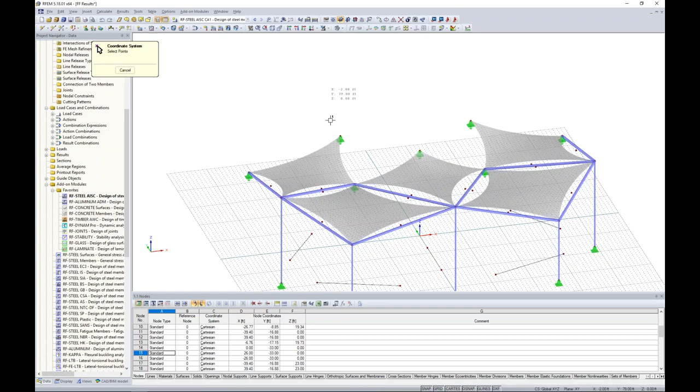I'm going to exit out of the results view here and create a new user-defined grid. This is exactly what we saw before. I'll select this option and click on 3 different points, and you can see the program automatically places that grid right through the center of that membrane.

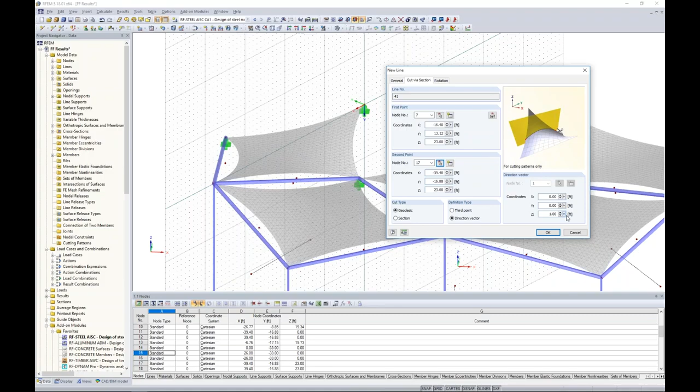To begin generating my cutting patterns, I right-click on a line and choose New Line, Cut via Section. Here I can select only my first surface and click OK. Then I choose my first point of my cut, closest to our office building, and my second point where it frames into this lower column. The cut type will be geodesic with a definition of a direction vector here in the 001 orientation. When I click OK, the program automatically creates this line element right through the membrane element with the form finding shape considered.

This is still too large for cutting patterns, so I need to continue drawing these geodesic lines further on this particular surface. I take this line element and use my Move Copy tool. Instead of using the global X, Y, and Z axes, I'm going to use that user-defined axes I just created in the UVW direction, and create 2 copies here in the V direction of 6 feet, then click OK.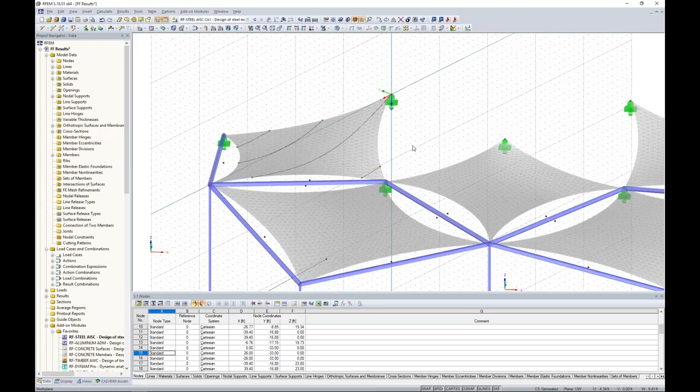Now you can see the program has generated a couple other line elements. We use the Move Copy tool once again in the Y direction, only 1 copy with a spacing of -6 feet, and click OK. So what we want to continue doing is placing these geodesic lines onto each membrane here. For the sake of time, since we're already running out of time, I have done that already with an already saved model.

So we continue placing those geodesic lines, and once we're complete with that, we simply go up to Tools, Generate Cutting Patterns from Cells. It's as easy as that. The program asks us which surfaces; we select surfaces 1 through 5, which is automatically populated, and the program automatically detects these different cells to generate these cutting patterns.

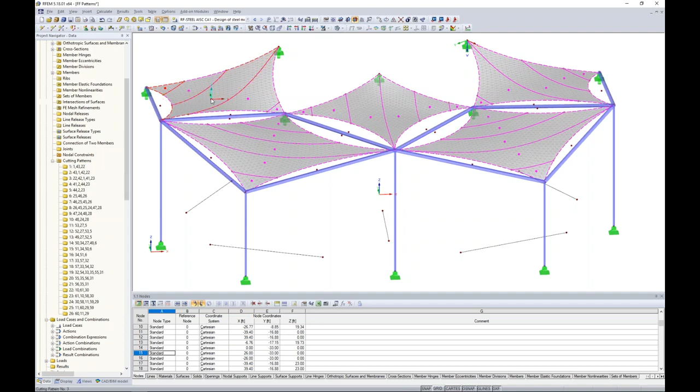What I'd like to point out is that our cutting patterns are now available to us in our project navigator, and you can see they're synced up in the graphical view as I go ahead and choose the different ones in my project navigator. We can double click on any one of these cutting patterns.

And this is where I want to point out that we can go ahead and add in here what's called compensation, which we already covered, in which case we now have a compensation tab that we can add in a percentage in the warp and weft directions.

We also can account for those allowances. Under the Allowances tab, this is that additional fabric. In our case today, we want to add in some additional fabric for those welding seam lines of 0.16 feet. The border lines, let's say we want to add in 0.33 feet. So that's going to be applied to this particular cutting pattern.

Now, if you don't want to apply it uniformly to all of the line elements for that pattern, you can choose the option here to define different lengths as well for each border line. And by the way, you can select multiple cutting patterns here and apply the same allowances to multiple patterns at once rather than individually selecting them.

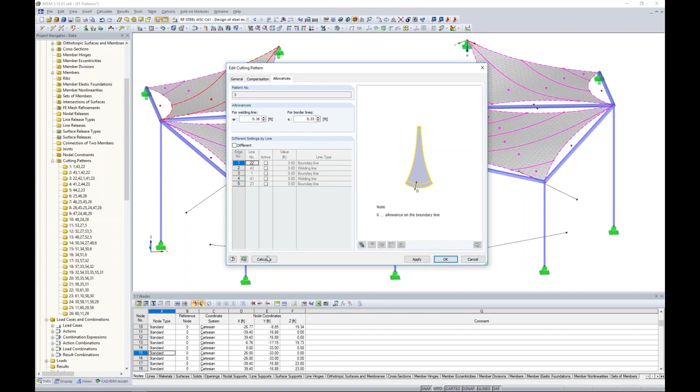So I would click calculate, and this takes, once again, just a minute to run. So we'll jump to an already saved model. And here we are once we generate those cutting patterns with our results available to us.

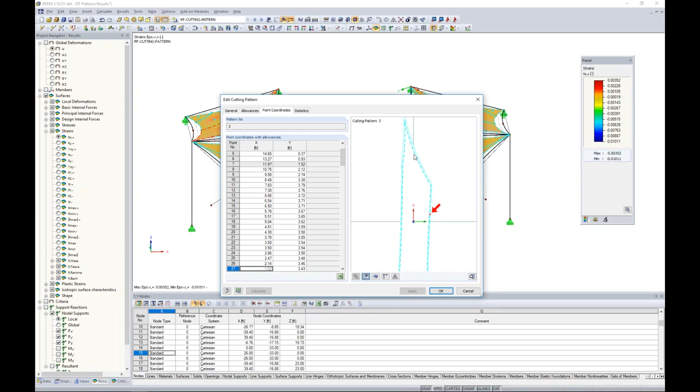So we can use our drop-down box to choose RF cutting pattern here. And what you'll first notice is that for each cutting pattern, what would initially be presented to us here is our table format. As I scroll down through this table, this gives me the X and Y coordinate points along the entire boundary lines of this particular cutting pattern 3. We can display here our allowances that we've added in, as well as the FE mesh here.

So this is the information you could export directly to Microsoft Excel if you'd like. It's also available to us in our main RFEM tables. The statistics is pretty important to point out.

The area of our 3D shape was 151.17 square feet. If we take a look at the area for the 2D shape, after that flattening process has been applied, we have 151.19 square feet. That's almost identical. We're off by 0.02 square feet. So again, this just goes to show you that something like the minimum energy method has a very accurate process of flattening these 3D shapes into 2D surfaces, which we can give to our manufacturer.

The other thing I want to point out is that we have results available to us during the flattening process just like we would with anything else. So we choose that option here in our drop-down box, and in particular, if we take a look at our strains, this might be important for determining what our compensation percentages should be. We can view those strains here for our surfaces graphically within RFEM along with our strain values here. Again, everything is available to us in our tables.

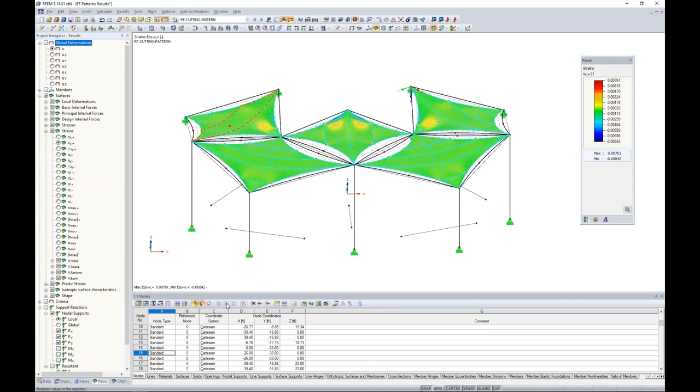So I want to lastly show you guys how to export these files to AutoCAD as well as REVIT. We'll start here with AutoCAD. I can go to File, Export, and I have a cutting pattern tab available to me here. This is where I just tell the program how many patterns I'd like to put in one row, the distance between the patterns, and I click OK.

This is going to create a DXF file on your computer. What we can do with that DXF file is open it in AutoCAD. And what we will be presented with once we open up that DXF file is, first of all, if I can orient this correctly here, you will be presented with our 3D view of our membrane structure. So these are our fabric membranes. If I zoom in here very, very closely, I see a small number here.

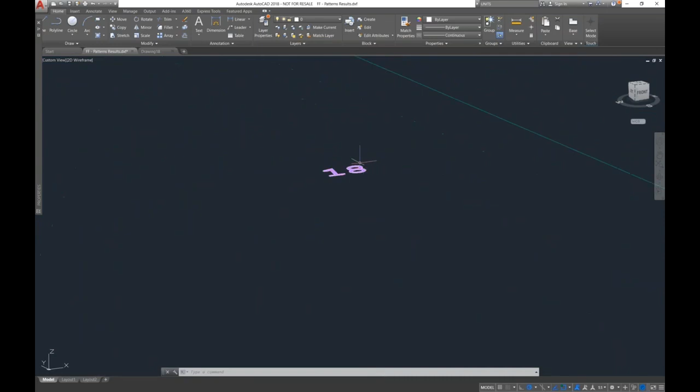This number represents the cutting pattern. Now, of course, we can increase these numbers if we'd like to do so within AutoCAD. Well, if I scroll over to the 2D flattened patterns and I scroll all the way in, we should see a number available here. So that's nice that we can correspond these 2D flat elements to our 3D surfaces here. Now we can take this and do whatever we'd like with it in terms of printing it out for our manufacturer.

Jumping back to the RFEM model, let's take a look at one of our load cases. We'll view only the first load combination with a 1.6 live load applied. Currently I'm viewing the deflected shape, and we'll decrease the deformation factors to take a look at our structure.

What we can do with this information is export directly to AutoCAD. First I want to make sure I have a new file open within AutoCAD, which I do. When I use this direct export, the program first searches for an AutoCAD license. I want to check the option for the deformed shape, and set the units to inches, which is what I currently have set in AutoCAD, then click OK.

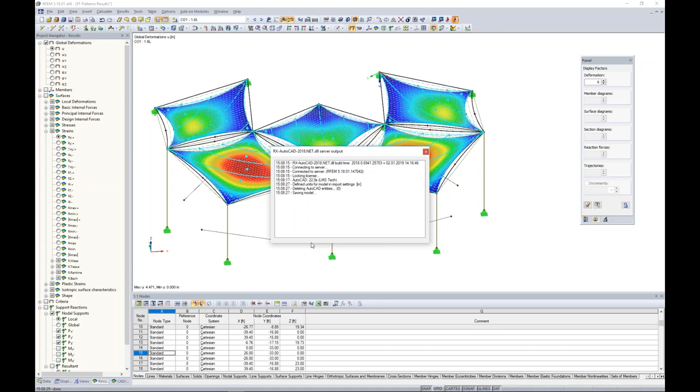This is different than creating a DXF file - the program automatically shoots that model into AutoCAD. If we open it up here in that blank model, you can see the structure is automatically shown to us directly within AutoCAD. That's the difference between a direct export versus creating a DXF file.

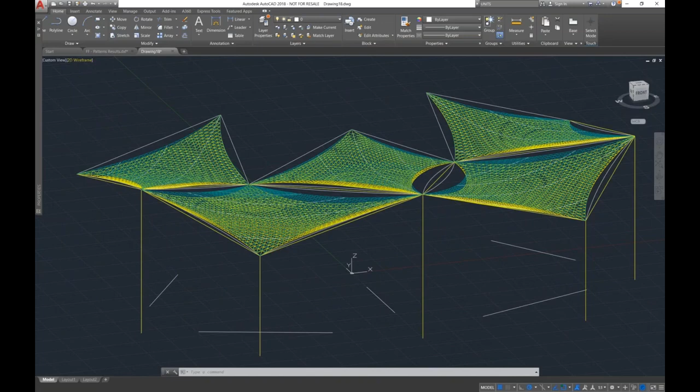This is my deflected shape of my membrane surfaces under that live load. Maybe we can change this to a shaded view instead. Then under our layers, we want to deactivate the initial form finding mesh shape found by the program, not under the live load, and scroll down to deactivate the additional line elements.

Now we're presented with a nice format for the deflected shape under that live load only of our structure. What I can do now is go to File, Save As, and save this as a DXF file - I'll call this one Form Finding Revit, with a DXF file extension, and save that to my computer.

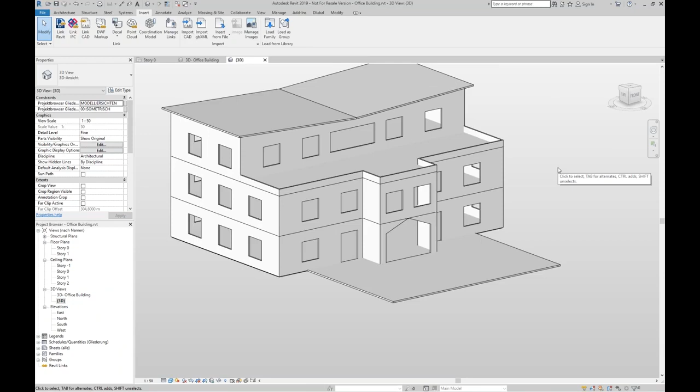Now I'm going to jump to Revit, and you can see here is my office building available directly within Revit. If I'm interested in importing this canopy structure into Revit, I can do so with this option called Link CAD. The program tells me I have to save my model first, no problem. Then we select our Form Finding Revit file we just created as a DXF. It's important to set the origin to origin positioning. I click OK, and here is our canopy structure.

Now what I need to do is select this object and move it to story 0, and it will shift it up. Now we can see that canopy structure available to us directly within Revit to add to our drawings and so on. So quite powerful in terms of integrating with different BIM options as well.

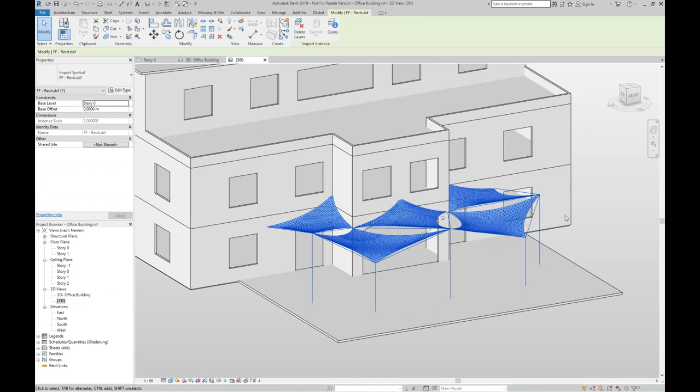So we can jump back to the PowerPoint here and go ahead and conclude today's webinar.